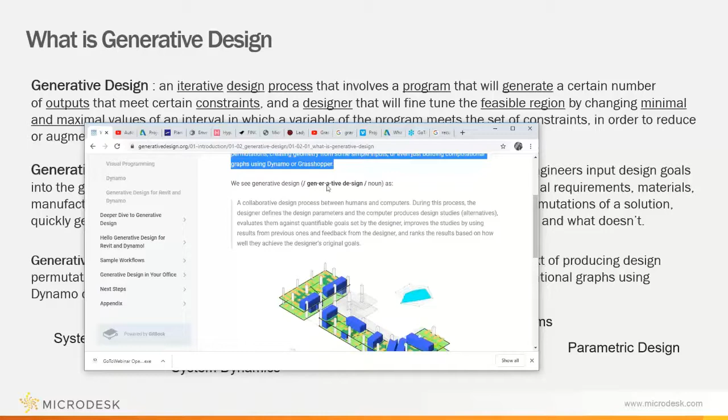I really like this definition of generative design, and I'm just going to pull up my screen here real quick. I highly recommend everyone check out this website, the Generative Design Primer, established by Autodesk for their Generative Design plugin in Revit. This is where I got that definition, which I kind of like, but we're still going to go further into it.

You may have encountered the term generative design in the context of producing design permutations, creating geometry from simple inputs, or even just building computational graphs using Dynamo and Grasshopper. It's nice, short, and succinct, rather than an iterative design process that involves programming to generate a number of different outputs.

Now there are also a lot of these buzzwords at the bottom: computer-automated design, these have been around since the 80s, genetic algorithms, and they are used in Grasshopper and Dynamo. I just want to establish the lexicon of where these things come from before getting into how the tools are used. A lot of these do happen inside the Dynamo Grasshopper environment, but the way they're used is not fundamentally based in the architecture world or the built world, so we have to consider that.

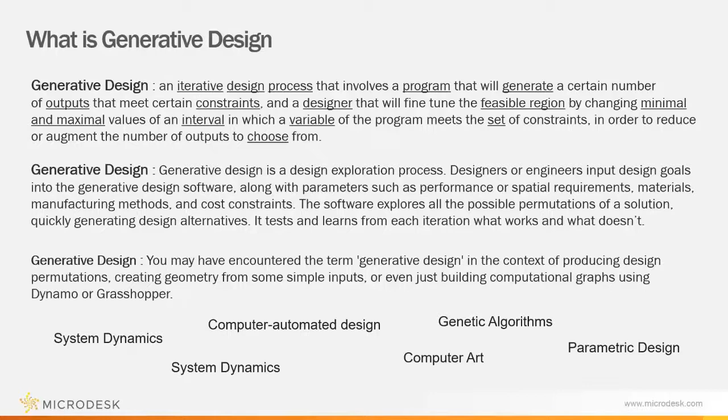So this is how I would like us to look at generative design. I want to start from the parametric approach, which has been embedded into the BIM environment, and then move to the computational approach, which is essentially a system with the parametric model embedded into it so that it can be manipulated. The generative is essentially the combination of these two, where you are able to have a recursive development, meaning you can have multiple permutations where these two things change inside of each other.

These three definitions I got from a white paper by David Stasiuk. I highly recommend everyone read it, because this will also help in the trajectory of how you want to use these tools.

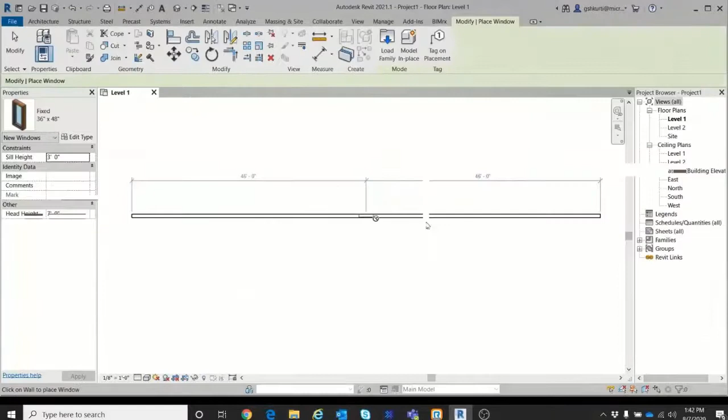So let's talk about parametric. Just want to go over a quick little video as we build up to the generative. So what I'm doing here is I'm basically placing a window family into a wall. Now, a window family - this is where the information inside the family is parametric, where you can stretch it, move it, but there's also type parameters and instance parameters that the window has embedded into it.

So here we're talking about the heights, and this is what we mean by parametric, right? Just a very simple example of a window. And then it's also got the types. Now, the one caveat to it being parametric is that the human still has to change the types and input the information.

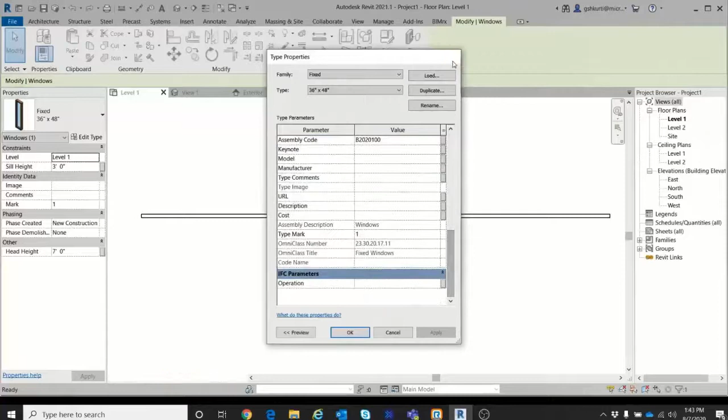Whereas next, we're going to talk about computational. What does computational mean? So here I've got a little Dynamo script, and I'm just talking about the idea of mapping an image to a curtain wall. This was something that was quite in trend back in the day, where a lot of architects were doing faces and images and things like that built into curtain walls.

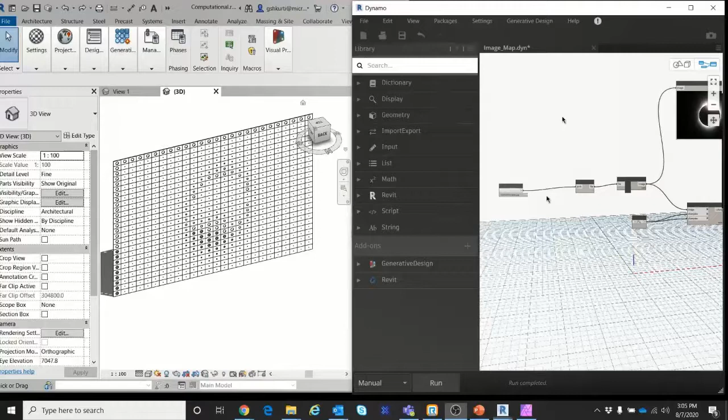So I'm just going to quickly change this wall and place a gradient map as an image while using the curtain panels inside of it to change it. And that didn't go too well - let me rewind that real quick.

So this, I would say, is computational design in its infancy, but essentially a Revit curtain wall is a form of computational design where you've got a panel mapped inside of a system, and then that system is able to change. Now with Dynamo, you have the ability to add more constraints to it and change the sizing of these holes and so on.

And so this is where you enter, in the visual scripting language, the computational side of things. Let me know if the videos are chopping up on you guys, because I will rewind them and play them again. So let's move on.

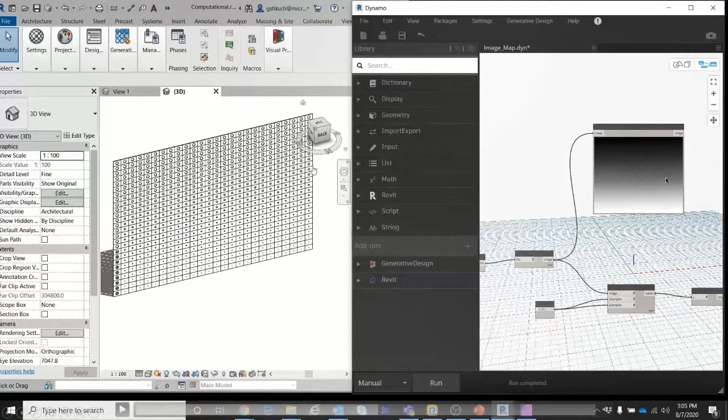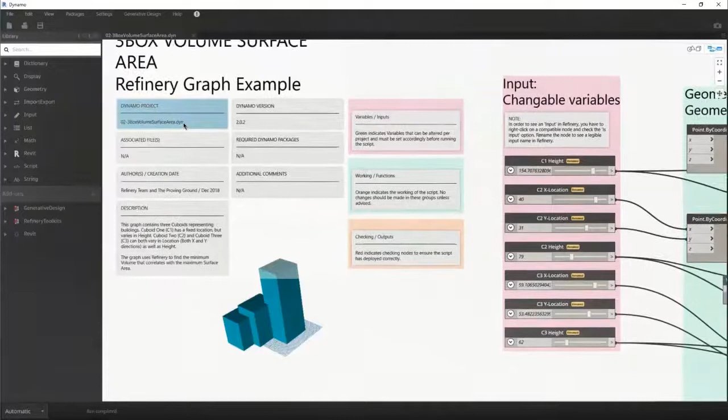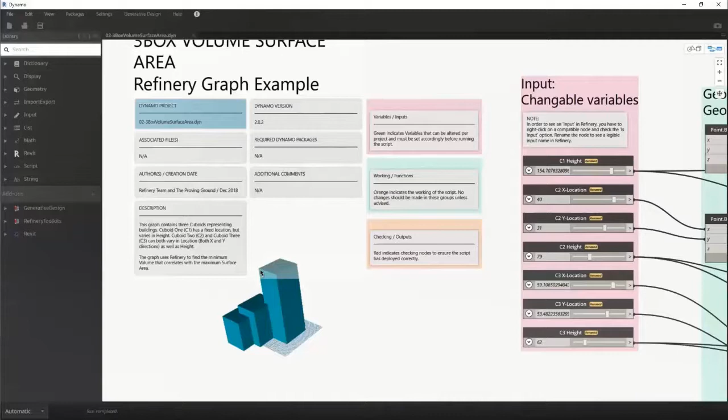Okay, so what we're looking at here is, back in the day, this used to be called Project Fractal. I was beta testing this for similar sort of studies. What they're doing here is just doing max height volume against surface area kind of challenge. This has now been adapted from Refinery into a Dynamo script.

But what I want to talk about here is, obviously these parameters have constraints, and what we're using the Dynamo script here for is to input it into a generative design engine, which is built into Revit and Dynamo now, and you can see that up here.

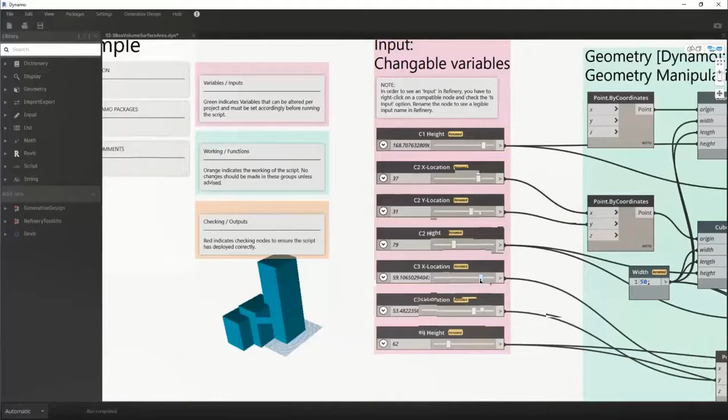The other thing that I want to talk about is that I know these seem pre-made, but one has to consider the problems that they're trying to solve. Revit does have some pre-baked ones similar to Dynamo Player for things we want to solve for, but like every project that we work on, the environment does tend to change the constraints that we're looking for.

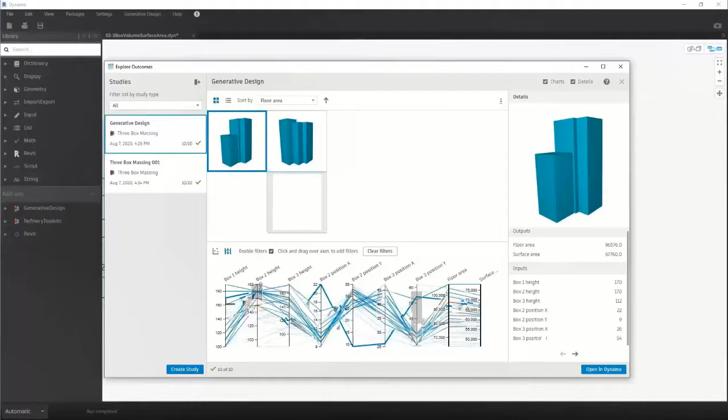So here I've basically sent that script into the generative design engine that's built into Revit. And now I'm filtering out all my different sort of solutions for what I'm looking for. Let's say I want my heights for box 2 to be 160 to 180, and my heights for box 3 to be 20, and so on. These are obviously defined by zoning parameters, clients, and urban planning.

Obviously, you could take this to the next level and also add sun analysis through Ladybug if you wanted to generate even more sort of constraints in how you're thinking about this.

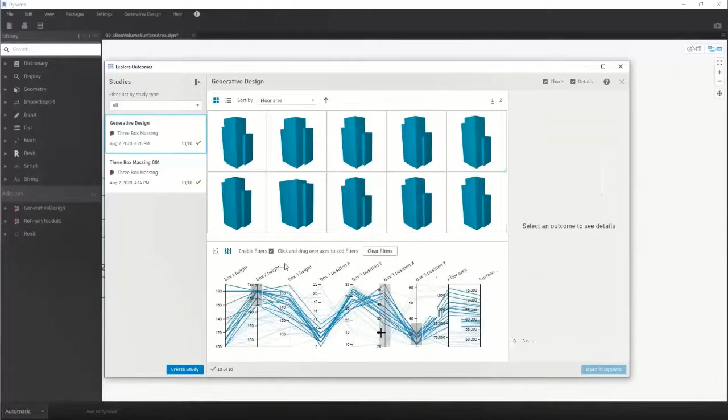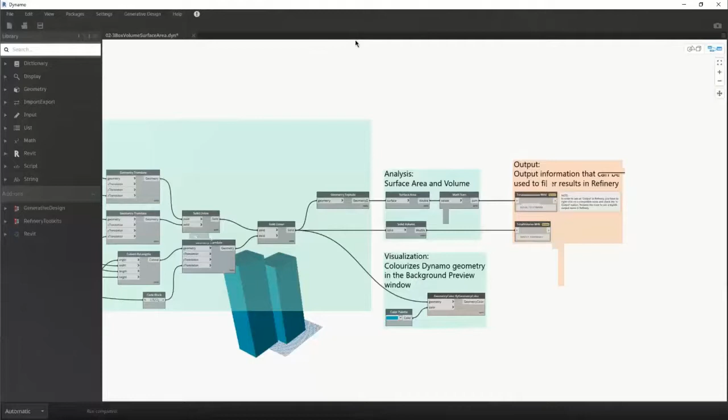And here I'm looking at the different ways you can filter the different options. I want to be clear that I'm using very simple ideas, but I want to highlight an overview or an aerial view of where the tools come from and how they've evolved over time. I foresee Microdesk doing many more specific webinars on each one of these topics.

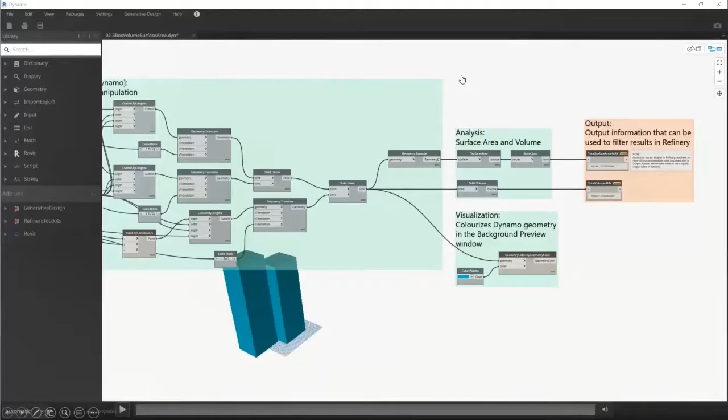So where did things begin? It started with Grasshopper, the first visual programming language that eventually inspired Dynamo.

Like anything else, when talking about genomes and evolutionary engines, you have to have an idea of how you want to solve your problems. This is on the NURBS modeling application end, which is Rhino. Now let's talk about the Revit side of things.

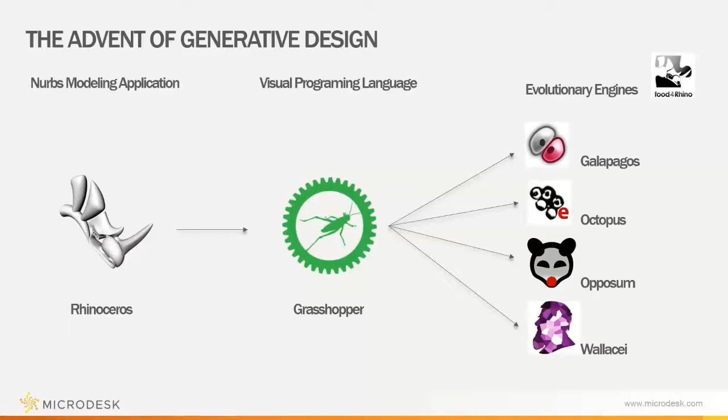On the Revit side, we've got our building information modeling software. This is essentially the most important part of everything here, because this is where you can document all your generative design solutions.

Dynamo is still there, so what I just showed in that refinery script was how you would use it inside of Dynamo.

And now the Pandora's box of what's possible. I'm really excited about this because we're able to go back and forth between Rhino and Revit using the Rhino Inside plugin, and we can generate with either Grasshopper or Dynamo into Revit. So we can check ourselves and compare how the two different generative design approaches, or as some would call it with Grasshopper and Galapagos, procedural programming works. What's really cool is that with Rhino Inside, you can natively bake the information into Revit and use it for documentation.

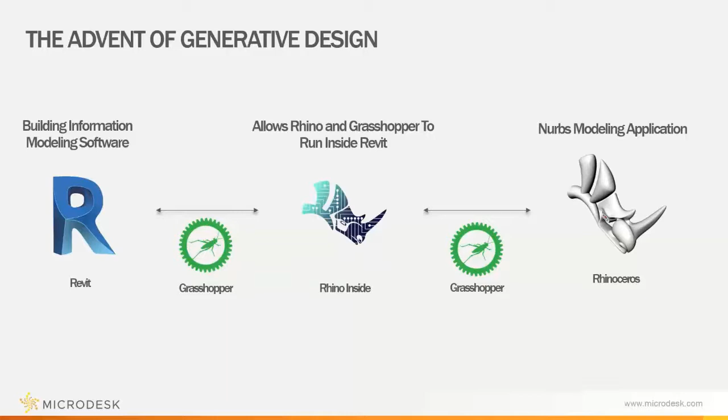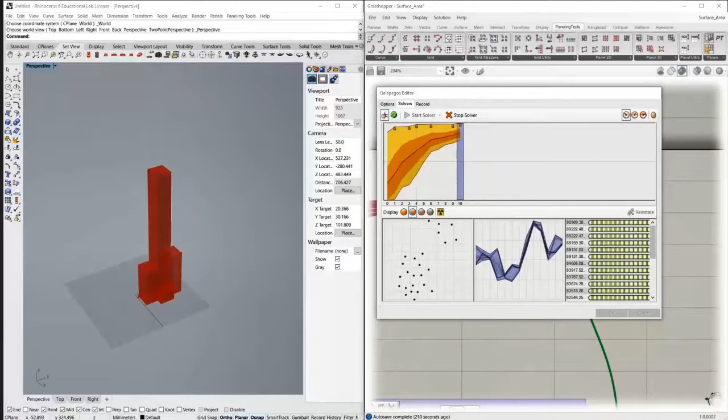In this example, I'll talk about Galapagos, where I've run an evolutionary solver for a volume against surface area analysis. Basically, the larger the volume, the less surface area, and so on. This is what an evolutionary solver looks like while operating inside of Grasshopper, trying to optimize the best results in the most efficient way for one solution.

As it's coming toward its peak in the graph, it's no longer changing as much. So this would be the best solution based on the problem I've put inside of it.

But it's showing me all the other possibilities, and I can filter those down to the best 10%, or see all of them. Over here I can pick one if I want to visually manipulate it myself and see what I like aesthetically.

I think this is where it gets really interesting in terms of giving the human the ability to see multiple design options in a span of minutes and then make a decision, versus going down a rabbit hole of constantly designing and redesigning. This does the heavy lifting for you, so you can start from an actual beginning point rather than from zero.

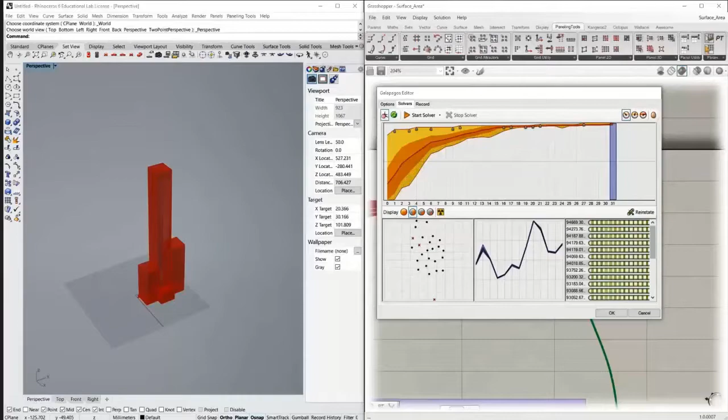So that's Galapagos in Rhino. Now let's talk about Galapagos in Revit. I'm running the same exact script, but using Rhino Inside, which you can see here.

What's really cool is that it's actually slower inside of Revit, but the Revit kernel is able to handle this, running the same evolutionary solver strictly inside of Revit.

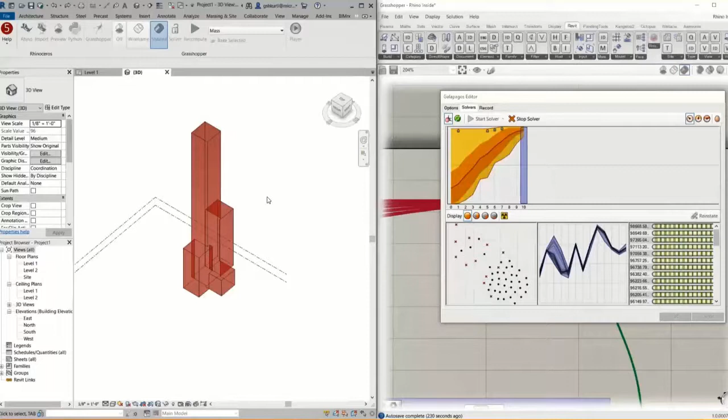Once it's done, I'll show you the different permutations of how I can pick from them. I can bake it into Revit and use it as a native massing—well, it's not a family, it's a mass. Let's see.

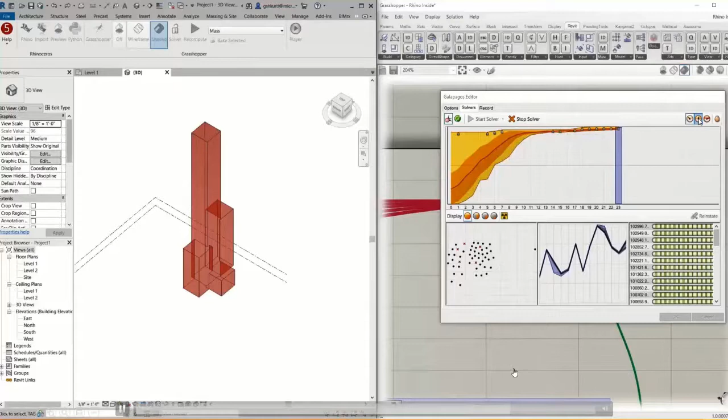Down here, I'm going to rewind because this is going to take a while. But a couple of things I want to talk about. One is that if you're unhappy with what you have, you can change it on the dime to another option and redirect that information back in here. So it is latent, as one would say.

Here I'm going through Grasshopper, and I just baked that massing family inside of Revit after I selected the most efficient sort of design.

Based off of a Galapagos evolutionary solver, Galapagos is going to go to the one essential best solution. It's up to the user to see if that solution makes sense design-wise, aesthetic-wise, zoning-wise, shadow study-wise, and energy-wise. Whereas with the Refinery solver, it gives you all the options, but it does not subject you to the one. It lets you be the guide of what you want to choose in terms of design to problem solve.

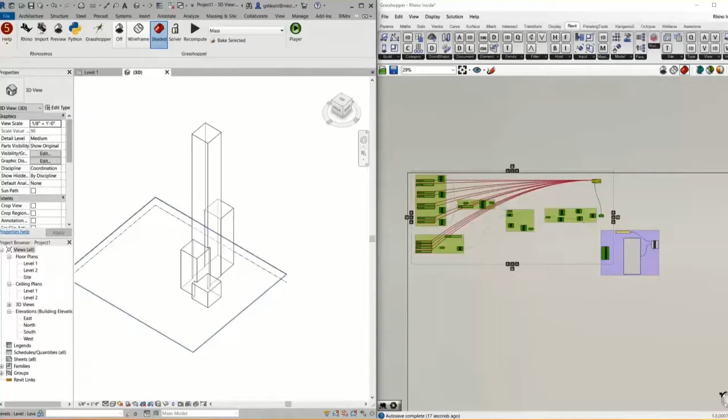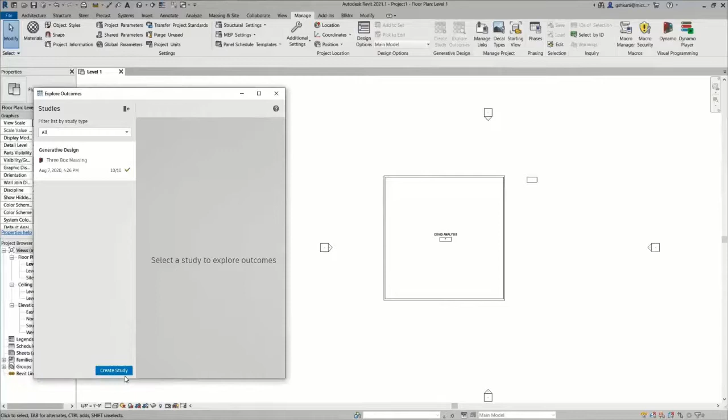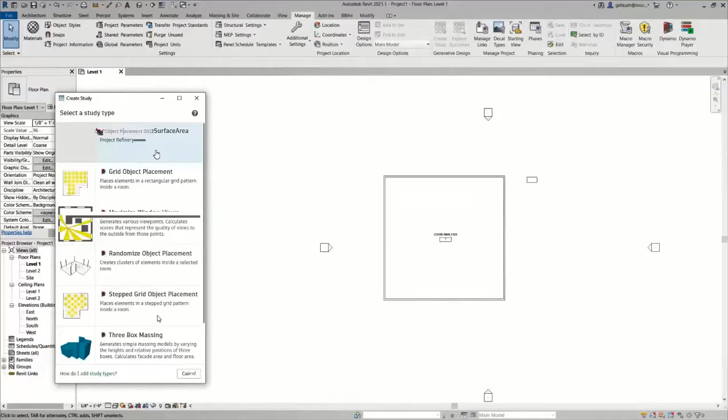So this next example is straight up based inside of the generative design function that Revit has to offer. These are some pre-baked solutions that are already pre-existing inside of this option, whereas the ones that you would make for your project would have to be written in Dynamo and then piped into here to create a study. You could start from the base here and use them or rebuild on top of them.

What I'm doing here is just testing out an idea of 6-foot diameter spacing using, I guess, current COVID times of thinking about office planning, which I know our team is working hard to create something not as crude as what I'm doing. I'm using the simplified version and testing this out, but I know Clark and company are really doing some awesome stuff with that.

Another thing I want to talk about is that we as Microdesk offer this service where we could build out your own custom outcomes based on the type of practice or business that you run. This is going to take a bit of time, but essentially what it's going to arrive to, and what I found out, is there are some glitches and things that need to be checked out.

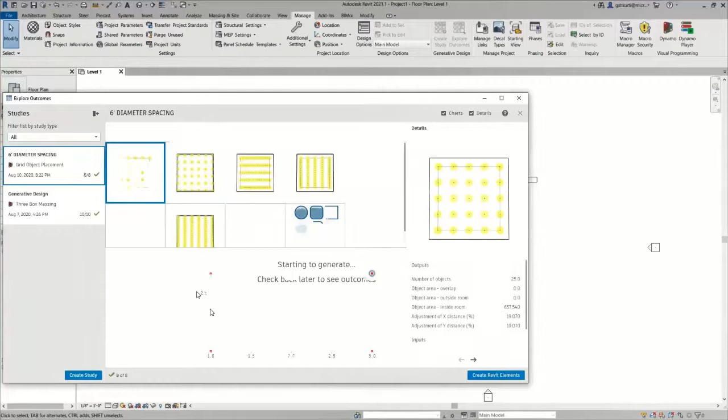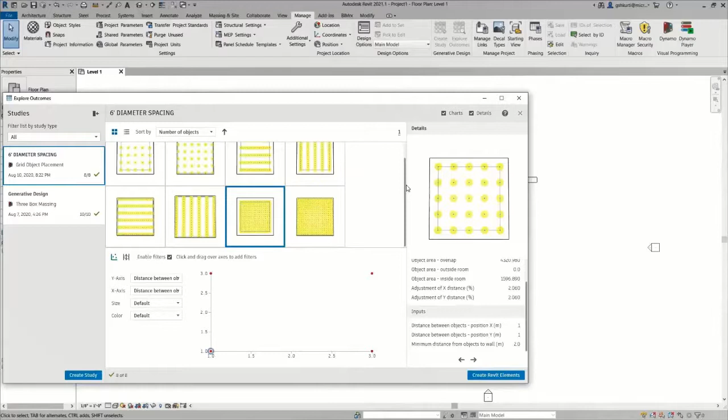So it's populating the different outcomes based on a spacing from the edge of the walls to the edge of each desk that I want to place, and I made my distance between the X and Y 2 meters, which is a little bigger than 6 feet. But I just wanted to see what kind of solutions we could get. And here I'm just going to go through the filters.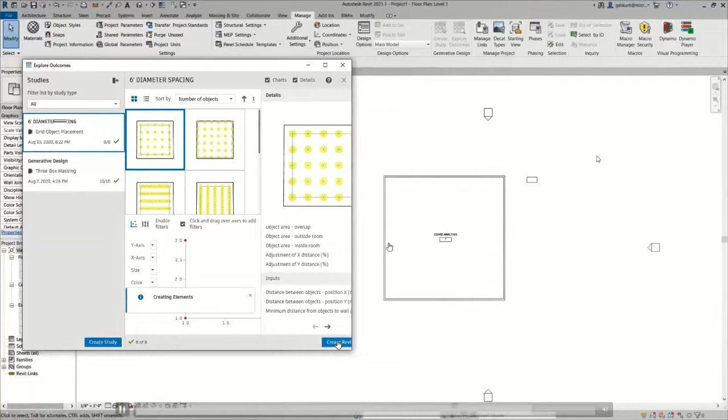However, what I found while testing this was that when you do place it, you're able to create the elements inside of Revit, but for some reason, and I'd probably have to go back into the code of how the Dynamo script was written for this, it doesn't center it inside of the room. It pushes it, or offsets it from left to right, or west to east. So these are the tweaks that one would have to go and manually change inside of the Dynamo environment.

So basically what just happened there is from that study, I was able to place all the rooms that would fit efficiently inside of this box.

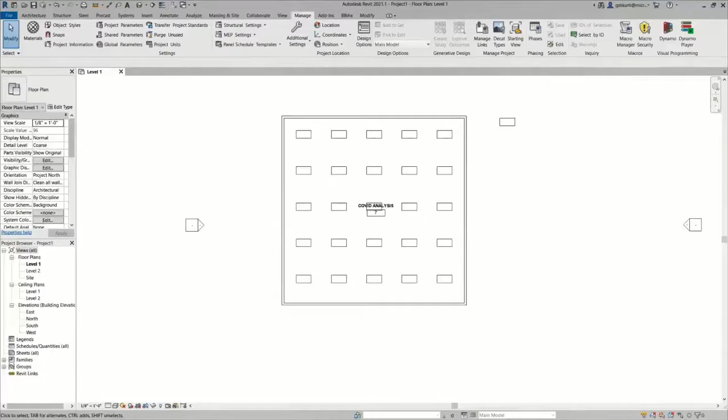So use cases, I can see a lot of things happening down the line from the 4 or 5 examples that I gave. But really what I'm excited about is that you can take conceptual and schematic design and really reduce the time spent on it, so when you're doing a redundant workflow, these kind of tools can just quickly help you get to the actual design process versus you sitting there and redoing the 5 to 7 different options.

Now, that doesn't mean that the architect doesn't have the inherent knowledge to project where he wants the project to go. I feel like anything like the pencil, like paper, like trace, this is just another piece of the tool belt that we can use to quickly invigorate our minds in terms of where we see the built environment going.

I definitely have seen some great examples in landscaping where you can do proxy generation. Square footage analysis for sure. I love design based on constraints rather than subjective genius. I think that friction between design and efficiency and standardization we'll start to see more of.

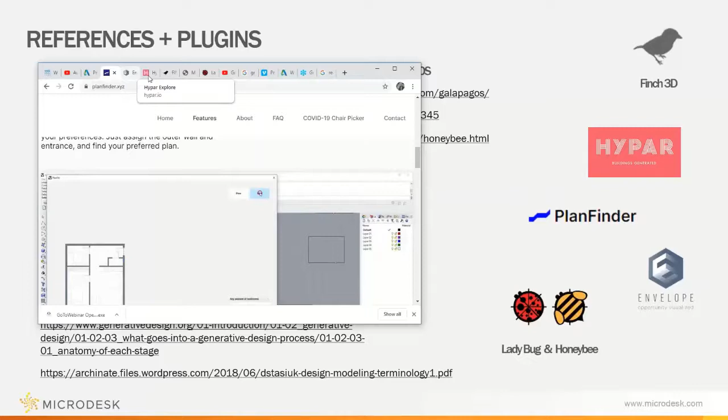Here I'll show you how one of these looks. Essentially, these guys are using a Galapagos plugin strictly inside of Grasshopper with Rhino. I really like that we're trying to work with PlanFinder as a partner - they're able to do the same thing but with both Revit and Rhino, which I think is a great cross-pollination. Hypar is also really cool. And Ladybug and Honeybee has now also been incorporated into Revit through Dynamo, so I'm going to check that out next after this study.

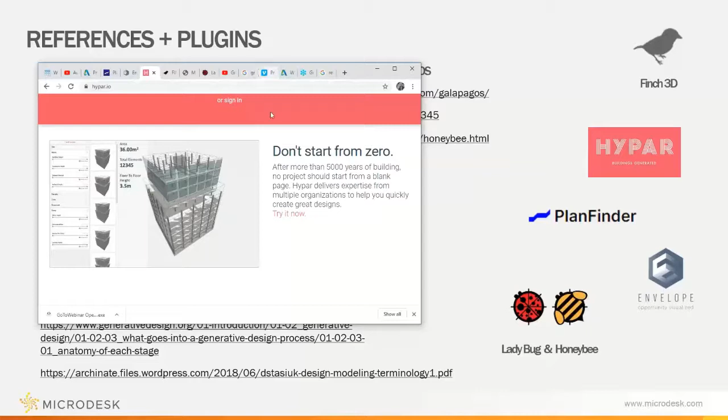Another big reference point where a lot of this has come from - I don't want to play the video, but I highly recommend you check this out. There's a gentleman called Nate Holland that basically built his thesis on the idea of, from beginning to end, strictly designing the building on constraints with no additive aesthetic finish from the design end. This is great, and I'll share this presentation when I'm done.

There's also a great Autodesk solutions page for videos. I just saw this one recently, and like I said, I'll send these all in an email of how to think about the different ways to use it. But I guess I'm going to open it up for questions - I feel like that was short and succinct.